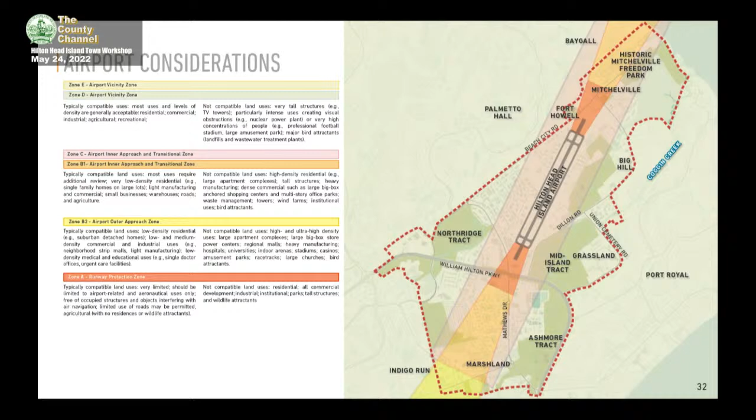What happens next is looking at potential changes in use and what those could look like. They have a development tool—an online tool. As we go forward, the town can plug those changes into it and see what regulations come back. So we have to start from what we'd like to see, and then continue to have conversations with them. But we've had a very productive opening set of conversations.

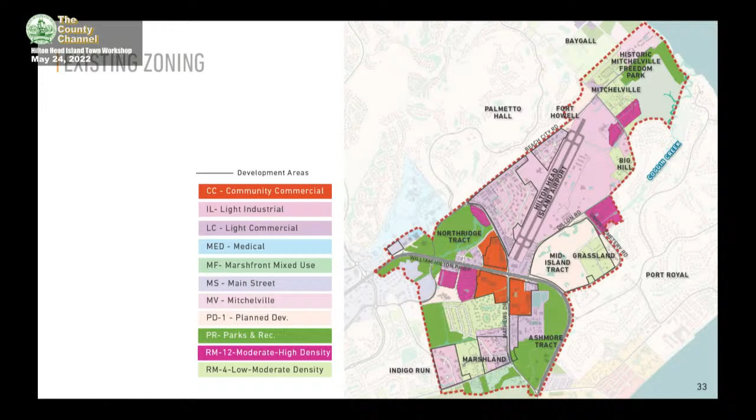Obviously, looking at existing zoning—what's there today. But in some cases we're more focused on what those land uses are, and where do we go forward from here. How might we simplify this map? We've got a couple places where we're suggesting some simplification, and starting to think through what kind of development we'd like to see happen here.

We'll also talk a little bit about existing residential areas and how those can start to harness the value of their property and add some housing to the overall needed supply on the island. Also wanted to take a moment to remind folks that we've also done a market study—when we look at this work together, there's analysis that we do, stakeholder input, and community feedback.

We also met with folks like the FAA and the state of South Carolina. We're also doing some analysis about what the overall demand is in this area.

We know there's some need that we've heard from the community for housing, and a desire to have a different kind of retail. So we look at what the demand capacity is, just to make sure that what we're showing and thinking about makes sense and is supportable in the marketplace. It's not saying all of this should or could be built, but it does say there's market support for this work we're doing, and that we're not thinking about something that will never happen.

So it's another piece of helpful information. I think it's interesting not to get hung up on these numbers or focus too hard on them, but really talk about the types of uses that are needed, meshing the need the community has expressed with the market supportability.

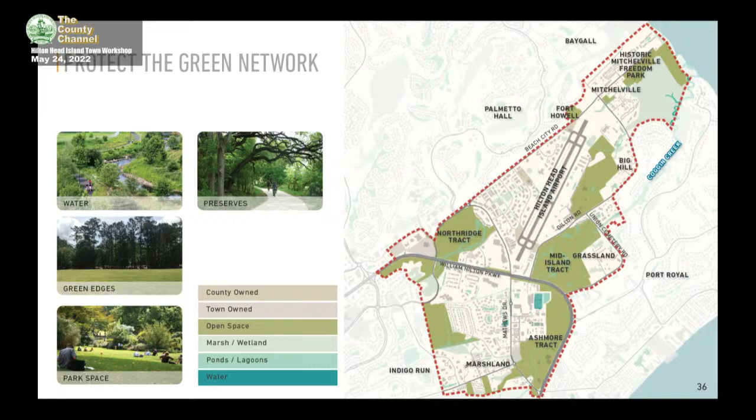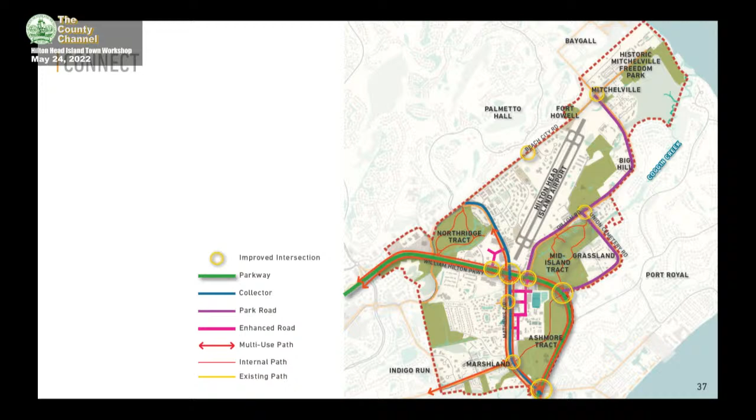This is a lot on one diagram, so I'm going to break it down a bit at a time. We want to talk about all the different types of connections that exist here, so we'll walk through that a little at a time.

Starting with the parkway, again, that green setback, that green edge really starts to create that park-like feel in the district, and honestly the entirety of the island for that matter.

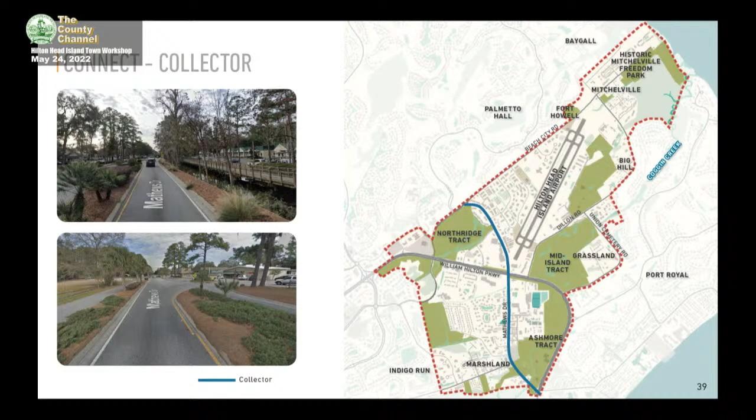Then we look at the next level of streets. This is Mathews, stem to stern, sort of your collector street. It's a connection, a place where we could take that character of having the multi-use path on both sides of the street. Again, very green, a connector between neighborhood uses along Mathews primarily here.

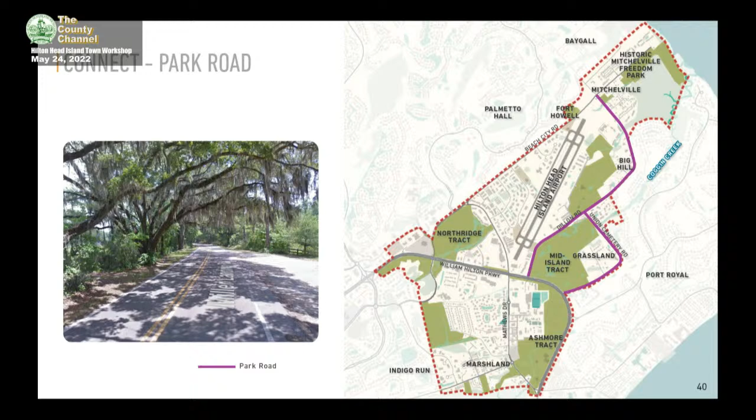And then what we're calling park roads, these roads that really have park on either side of them. They ought to be very park-like in character, have a multi-use path, perhaps not just on the park side of that road, and really provide those connections to the important green spaces throughout the district.

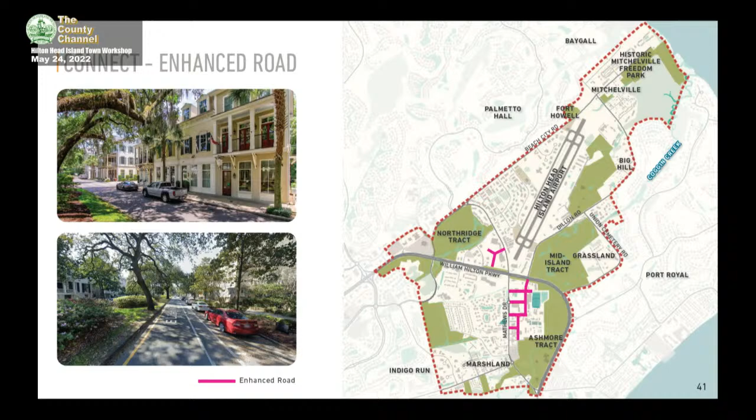And then interior to the block. As we start to think about changing the character of these commercial areas inside the Mid-Island District, we need to create, instead of driveways, drive aisles, and parking lots, things that start to look more like streets. That's what you see in these pink colors, as you come off both Matthews and the Parkway, you enter into these sites as they potentially evolve and redevelop. These become more neighborhood scale streets. You start to break down the scale of large parking lots, and you have something that looks like these images here, creating some walkable character inside of those developments once you're off the main streets.

And then the pathway network. Looking at the Parkway writ large, the goal is having multi-use paths on both sides of the Parkway, to make sure that character exists. Same thing on Matthews. Going down into Marshland, connecting through the Ashmore Tract with the trail to interconnect with the Mid-Island Tract, and then all the way up to Mitchellville Freedom Park, where there are some existing pathways. Potentially some ways to walk around the Northridge Tract as well. We've got this interconnected set of green spaces that enable people to get around the neighborhood in a different way, but also make the choice, if they want to leave the car at home, to have some experience as they go to new commercial spaces or visit the green spaces within the district.

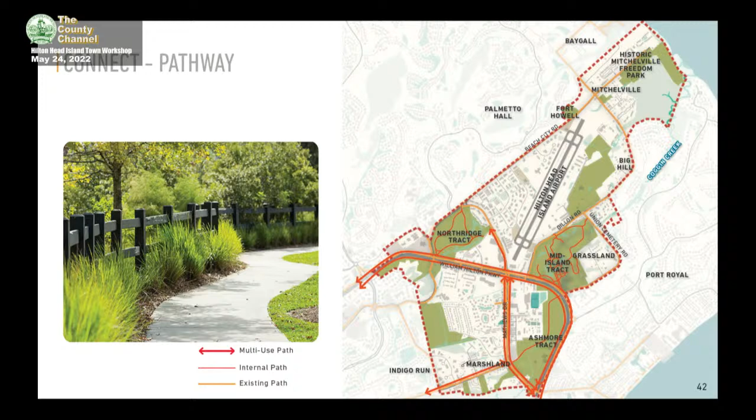So again, these off-road, multi-use, internal path connections tying into the existing path network is super critical as we look at the district.

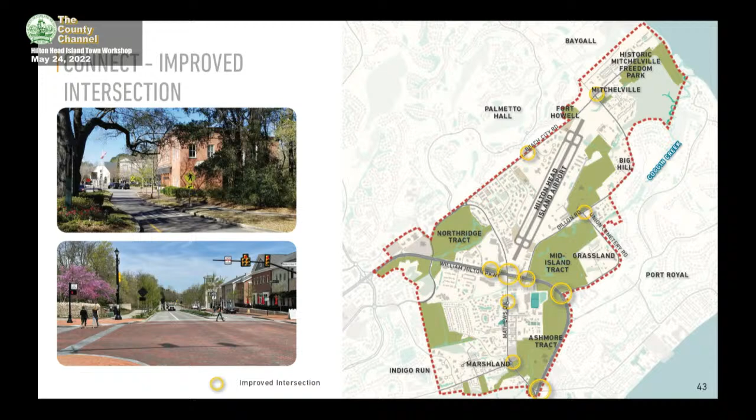And then improving these intersections. We know we need to safely get across 278. Significant opportunity there to make that crossing a lot better from one side of 278 to the other. But there are a lot of other smaller intersections as you go down Matthews, as you head up Dillon, as you get close to some of the other parks, as you go up toward Mitchellville, where we need to make sure we're getting people safely around the district as well. So really looking at where those conflict points are between vehicles and pedestrians, making sure it's safe to ride your bike or walk from one thing to another in the district. So really key importance that we'll be looking at there.

So these streets start to give us some character to build on. If we have a great green parkway, and an interconnected system of green streets and pathways that connect our park spaces and commercial areas together, where do we think we could start to evolve some land uses?

We'll start with the mixed use character that we think is possible here in these purple areas, as things change, as maybe property changes over. There's a desire to do something different than the big box, parking-lot-oriented commercial spaces you have today. What could these things start to look like going ahead?

So we talked a little bit about the mix of uses potentially there - residential, restaurant, townhomes, maybe some office, potentially some institutional spaces, all built around some open spaces that I think would be in the community. To get to some of these thoughts, we looked at the capacity of these sites, what the community desires are, and what's supportable in the marketplace. That's how we arrive at some of these densities - I don't think this one's very different than the Main Street category you have today, but 12 to 18 dwelling units per acre. That's sort of below where I think Harbor Town and other places are.

We think, in fitting with the height restrictions because of the airport, and looking at wanting these things to park themselves with shared parking, it starts to dictate how these things lay out. And then, of course, we've got that setback we're trying to preserve 150 feet off the parkway as well.

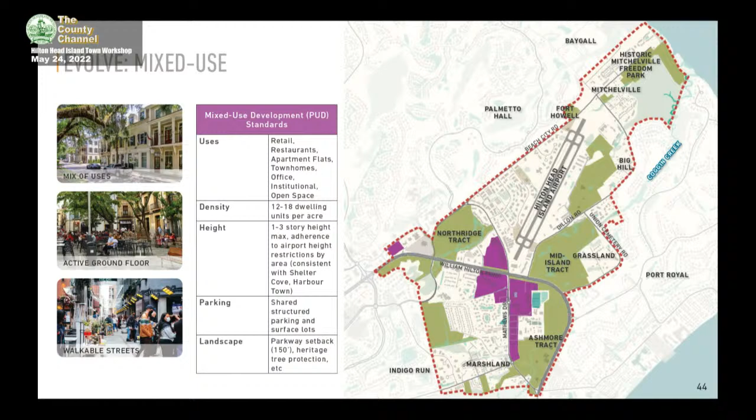So really starting to think through what could work here and what's the character going ahead that's both supported in the marketplace, desired in the community, and can show where we fit in this mix of uses, have active ground floors, have walkable streets inside of these parcels that make it more of a destination for the neighborhood and others who may be visiting the area.

Around the airport, the market study closely showed that we have a need for commercial and industrial warehouse type spaces on the island. That's sort of what's in there today. We do expect this probably evolves a little bit as the airport builds a refreshed terminal, and they have some uses there they're adding.

There might be some hospitality uses that come into this, but commercial support services. We've already seen a brewery open up in this area. So allowing for that sort of quirky mix of uses is okay. Those are the types of spaces where I think it's low cost, where you can have a creative startup type business locate.

And again, we're looking at an airport adjacency, so we're limited in terms of height, and the parking is dictated by other performance measures in this area, but it primarily is self-park depending on the use.

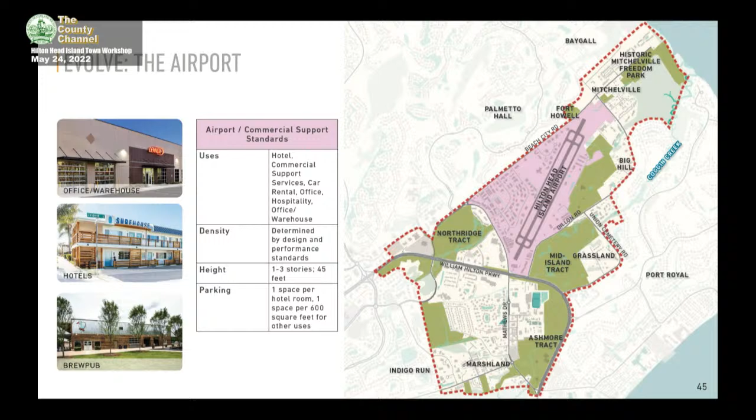And then the final category we look at are opportunities for additional infill in existing residential areas. So again, we're talking about lower scale housing like we're showing in these benchmark imageries—single family, maybe some townhomes, some park-under townhomes and cottages, parking handled on site, allowing for neighborhood commercial.

That's sort of the business-in-the-home type of commercial space. There's been a lot of conversation as you've gone through the Gullah Geechee culture preservation report about different types of densities—4 to 8, 8 to 12, depending on where you are. We sort of put the top end in there for the sake of conversation today.

But the bottom line is we think there's some opportunity if folks in those areas would like to add some additional housing that's needed on the island. The eventual density and what those development standards look like is open for discussion. The idea is, if people want to harness the value of their property, there's an ability to do so.

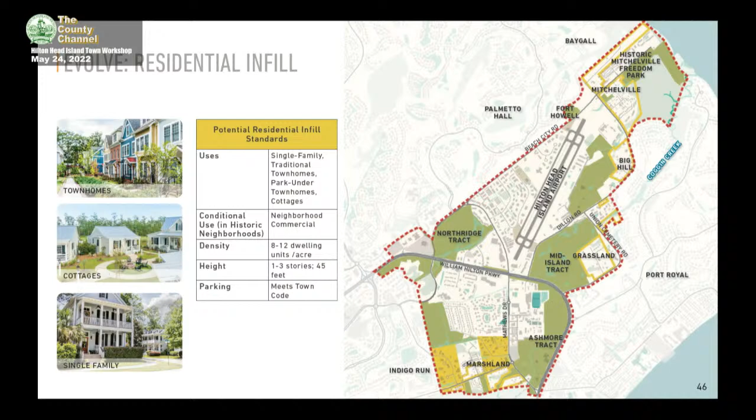And I know the overlay has been something you all have been talking about for more than a matter of months—that'll still continue past today. But we want to acknowledge those conversations are happening, and there's an opportunity here, if desired, to add to that residential supply we've identified in both the market and public comments, in addition to the mixed use sites we've shown.

So that's how all of this starts to come together. That's our thinking to this point—looking at those systems of both green spaces, an interconnected network of streets and pathways, and how that starts to inform redevelopment that could occur and evolve over time, and where those opportunities are throughout the district.

Our next steps will be to have some conversation today with you all, start to think about final recommendations, and bring that back to you in the summer with recommendations for future town actions—establishing that future land use map, looking at revising zoning if needed, establishing development standards, and creating redevelopment standards for key parcels going ahead.

And that will really start to guide those conversations, because we've realized some of this is town-owned ground, some of it is owned by private property owners, and you need to have the ability to have those conversations and shape what certainly will change. Things aren't going to stay the same. What do we want it to look like in the future?

Drew, let me ask you a question about that—something that's been on my mind. First of all, you've got a lot of exciting ideas here, and we can all get fired up about it. But one of the big challenges we face is that most of the land we're talking about, that is not the park site, is privately owned.

Mm-hmm. A lot of that is large traditional shopping centers. And you're encouraging getting away from that. And I certainly accept that notion as being a worthy goal for us. But what tools are available to communities to promote that sort of conversion from a large parking lot shopping center down to a neighborhood feel? What are the tools that people use for these things?

Yeah, I think it's a great question. And I think we're starting to, if you look at Port Royal today and what they've done, they're starting to respond to the market. So the market does shape some of this, which is really important. They're starting to take those larger boxes and subdivide them into smaller spaces. So you could argue that the market is already starting to push people in that direction, and starting to think through that with them, I think is really important.

There's an interim step we've taken with some private property owners that operate more traditional commercial spaces, and that is to start to pick away at those drive aisles and start to turn them into things that look more like streets, having open spaces, outdoor seating added to those things. So I think there's some iterative things you could do, but really it starts with crafting that vision. And so we say, look, this is where we see opportunity, and it enables you to go have a conversation with that property owner and say, all right, what is your view of the future? This is what we've talked to the community about. See where things overlap and mesh.

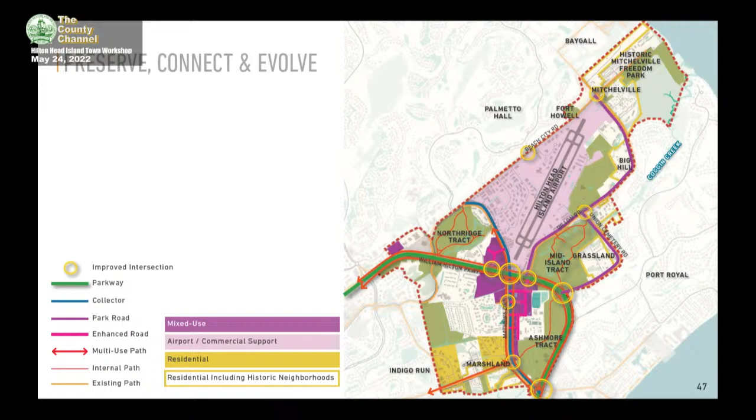It's the Mid-Island Tract and the park that would be there. So as we know, we need to accommodate the traffic. Under separate action, much more detail, including those intersections, so we'll satisfy those issues. But...

That's not one's fault. That's just the way the towns develop over time, incrementally. So we think it's important to establish a center to the place, provide for the conveniences and the daily needs of the folks that live in these neighborhoods in the Mid-Island. We're trying to create a center that maybe has not been here in the past.

Excuse me, if I could have a follow-up question on Glenn's statement. The path of least resistance to affect this change would be to have harmony of thought with the existing owners to move into a new direction. So an existing owner is going to want to know, when they think about possibly changing what they're doing from a service standpoint, from a retail standpoint, how strong is the market behind that vision. So my question is, how robust is your market analysis? Is it detailed enough so that an existing landowner or store owner could say this direction could get legs, this direction could be successful?

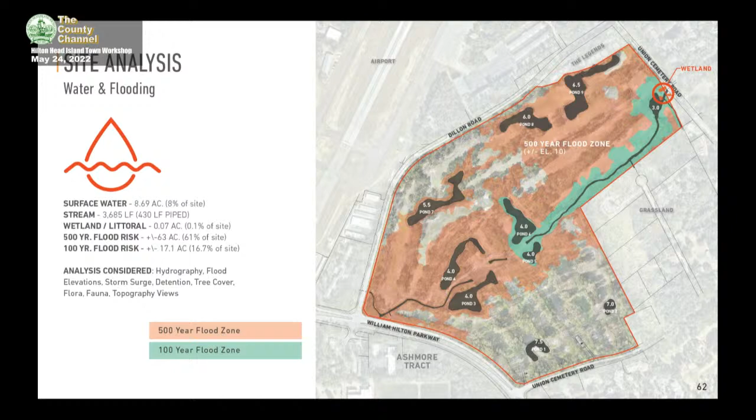We've done the physical analysis of this piece of ground, understanding that in its most recent use, this was a golf course. Though it's largely green, this place needs to be restored before we do anything moving forward. It's got a series of ponds that were used largely for irrigation, and many of them are lacking in high water quality. We've got flood conditions and storm surge conditions. So as you start to peel back the layers of the onion of what Mother Nature has given us, there are challenges and issues to be solved.

So broadly, we've broken the program down into three uses: civic and cultural, recreation, and natural systems. We've heard from the community that they prefer a passive park here. We've got other places to put our active recreation, and town staff has done a great job fitting active recreation into our other parks so that island-wide we can accommodate all needs and users. So we're not making this up as we go, though fortunately we've got experience working in wonderful cities and towns and creating wonderful parks.

But the council has suggested to us that we need to test this back against recognized national standards. We think it's important to understand that we have intentional design. We just don't create an open space, put a park sign out, and call it that. It needs to be inclusive and welcoming to everybody.

Sustainability and resiliency are baked in. We've got to be able to maintain it. It's got to be beautiful. It needs to fit the island character. It needs to be flexible over time. This isn't going to be a snapshot that carries on into the future. We'll constantly be remaking this park. Therefore, it is timeless. It needs to be branded and communicated.

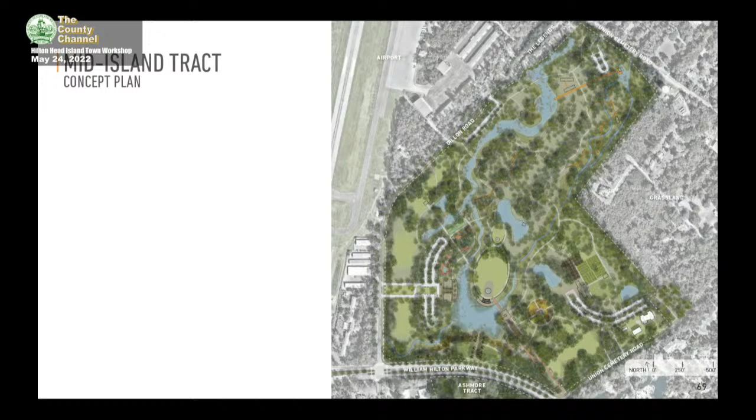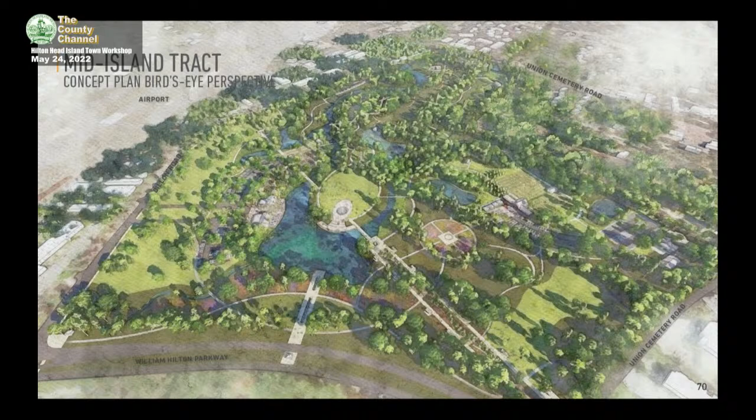This is an overall look at the 102-acre tract that at this scale is difficult to understand, so I'll break it down into the incremental pieces. This is a bird's eye perspective, hovering over the Ashmore tract, looking to the northeast with the parkway at the lower edge. Dillon is on the left, Union Cemetery on the right, and it gives you a sense of the size of this piece of ground.

We're blessed to have this size of park. It's also a challenge to pack these uses into 102 acres. It gets small in a hurry, and it's also large. Therefore, it's a maintenance and operations challenge for sure.

So we've broken it down into bite-sized pieces. We've got 5 areas we'll show you more detail of. First is the heart of the tract. We've mentioned the Mid-Island is the heart of the town. This is the heart of the tract. And I think as such, it needs to be that wondrous central gathering place.

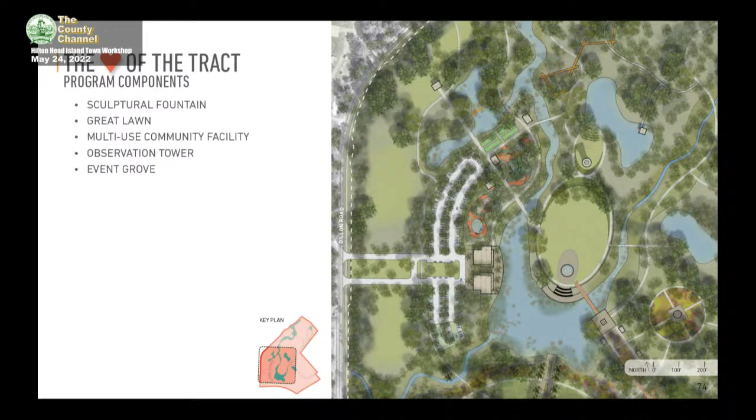This is the town's living room from where I sit. In plan view, that has an activity lawn, a great lawn that's between 1.5 and 2 acres of open space, maintained lawn for any number of events—4th of July, Memorial Day, Gullah Days, anything the island puts forth can happen there. Community facilities include an observation tower so we can see this beautiful piece of ground from a higher elevation, not just from ground level, a sculptural fountain, and an event grove or modest amphitheater for events and activities.

First, the sculptural fountain. Again, this is in clear view from the parkway. So as we are stopped at traffic lights at Dillon and at Union Cemetery, we've got diagonal views into the park, head on as you pass by the center of the park. The sculptural fountain is the annunciation that there is a place there.

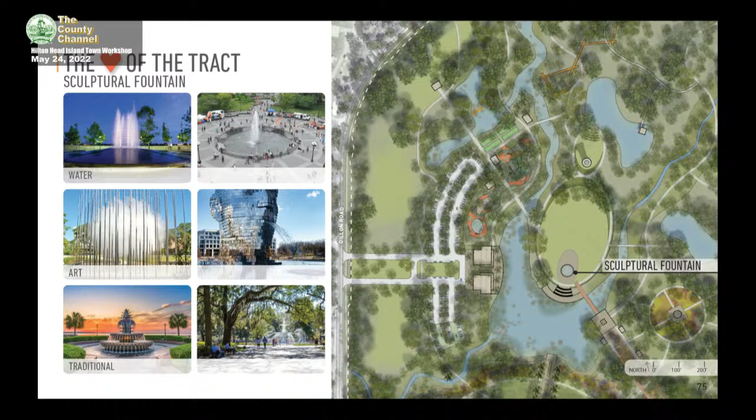We've got copious examples as we've shared with you in the past. It could be something as simple as a large single water spire. It can be a piece of sculpture or art, and it can be water as art. Some of the traditional fountains we show here, Charleston and Savannah, are local examples.

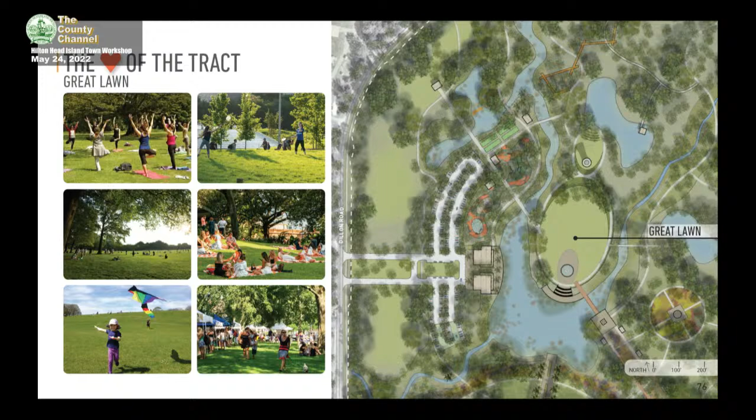The Great Lawn, again, a place for daily exercise, open play, concerts, activities, art exhibits, art festivals, any number of things. Again, the town's front yard.

An observation tower—this can be optional for sure. There's a lot of these issues we'll go through that are optional. There are also donor opportunities. We may find corporate or individual sponsors that want to buy that observation tower for the sake of the town. Again, this places folks at a whole different elevation and observation point for not just the eco park, but activity that happens in the civic space as well.

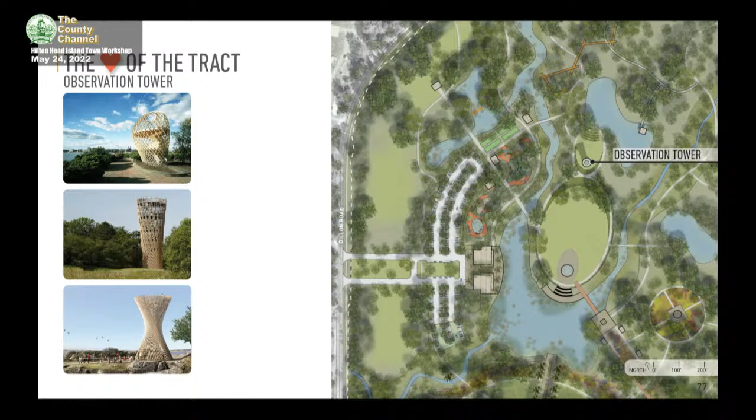How big is that? How tall is that? Certainly, there's public safety that has to be considered at every turn. How much does that cost? That's all subject to further investigation, but there's something very dramatic and exciting about getting people off grade and getting them perched up above the canopy.

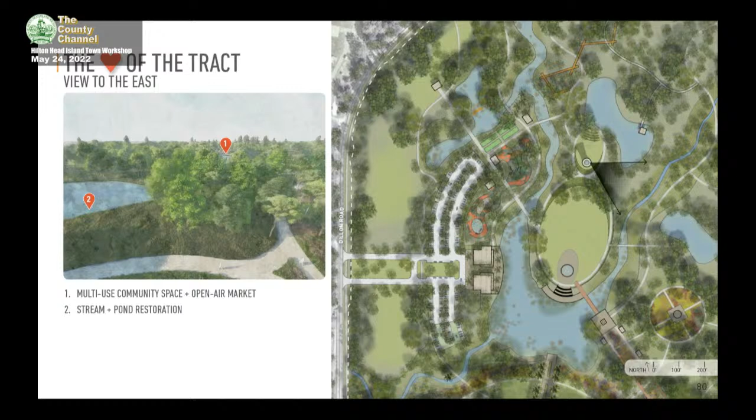So you can see in this perspective sketch from that tower what you would see looking to the east, looking at the Great Lawn, looking the other direction to the Eco Park, being above the canopy, seeing the water bodies, and then into some of the cultural gardens and the event grove.

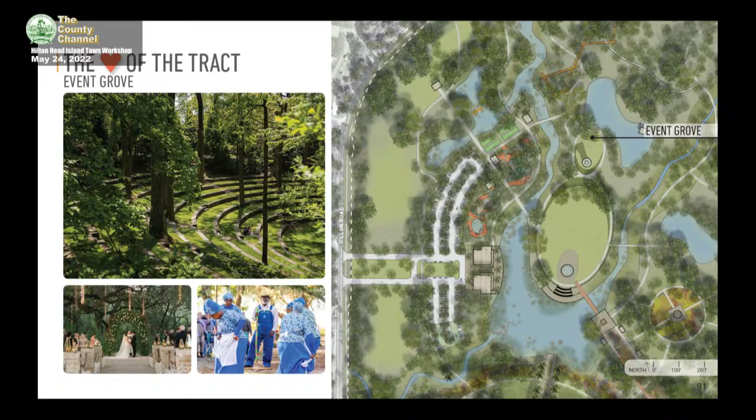That is an area that is not meant to compete with Lowcountry Celebration, some of our bigger outdoor events, or even some of the things that happen at Shelter Cove. But this is a great opportunity in a beautiful environment, off the beaten path as it were, for weddings, small performances, recitals, poetry sessions, any number of small, more intimate events that is directly adjacent to the event lawn of the Great Lawn, but has some intimacy to it.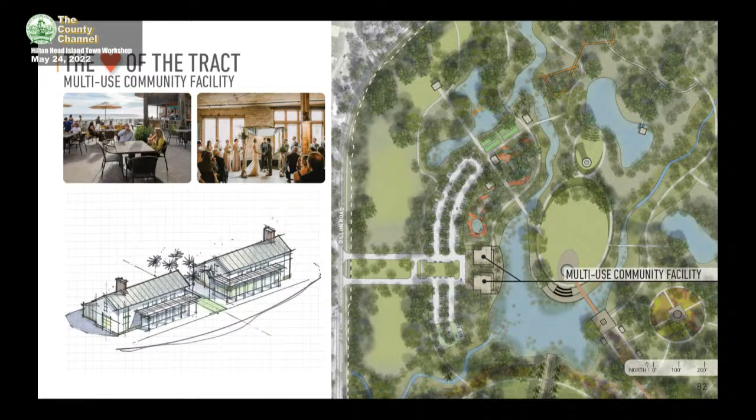Also, accessed off of Dillon Road is this multi-use community facility, a place for receptions, gatherings, weddings, funerals, with full food service that can be supportive of those activities. It can be freestanding food service as well, but town-owned, town-developed, and operated.

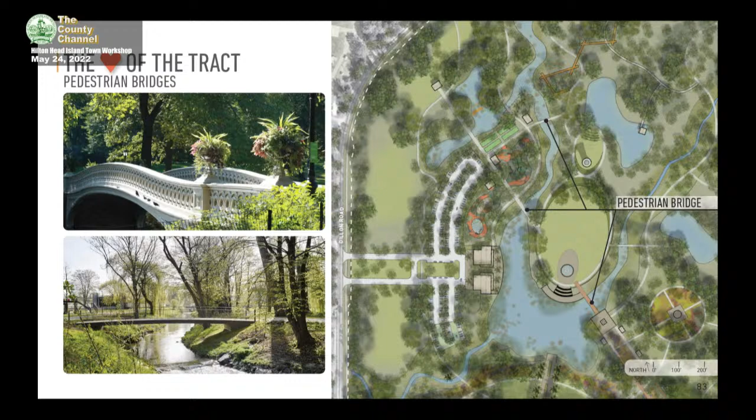And pedestrian bridges. This peninsula, if you will, looks to be an island from the southwest, but I think we can bring civic architecture to the table as well. The upper left example is creating art out of something that has a legitimate function to it. That's moving people from one place to the other, so they don't have to all be prefabbed, off-the-shelf pedestrian bridges. We can make a statement and a piece of art with them.

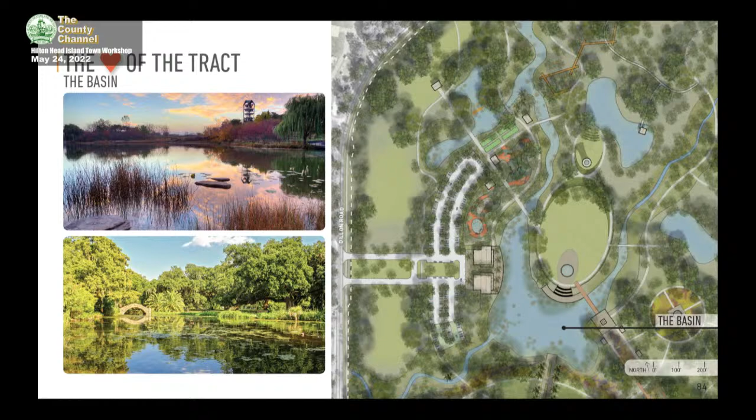The basins, as I mentioned before, the ponding system there does not have high quality water or wildlife for that matter. We're looking to interconnect many, if not all, of these ponds so that we have a natural flushing of the water system from the watershed that starts to the south and west of Port Royal Plaza and flows through this site. Take advantage of that interconnectedness and create legitimate water bodies, not large puddles, and help with the aquatic growth.

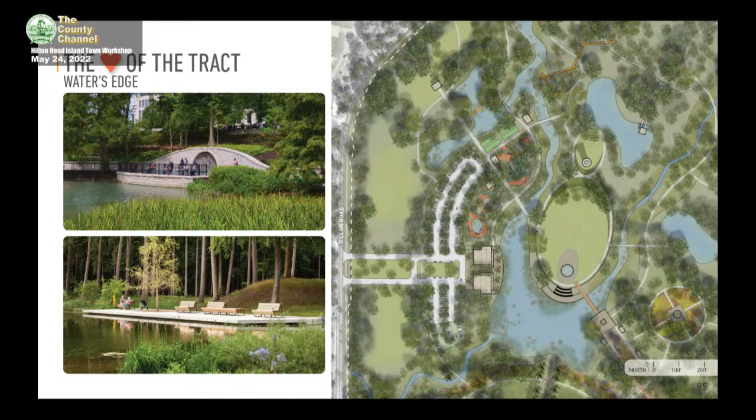Also, to have water's edges, get people to the edge of the water, but not necessarily into the water. We've got critters in that water. We have that all over the island, but to take advantage of those water bodies for pure viewing pleasure and for relaxation is an added benefit.

Moving to the next district is what we're calling the Island Heritage. Again, I shared with you the importance of the historic neighborhoods that are in this district. This is physically, literally the backyard of the Grassland neighborhood, and there is a distinct need we've come to realize through the public process for outdoor gathering, for multi-use space, for an open air market for the sale of foodstuffs and crafts, communal gardens for legitimate growing of food stock, and also outdoor gathering.

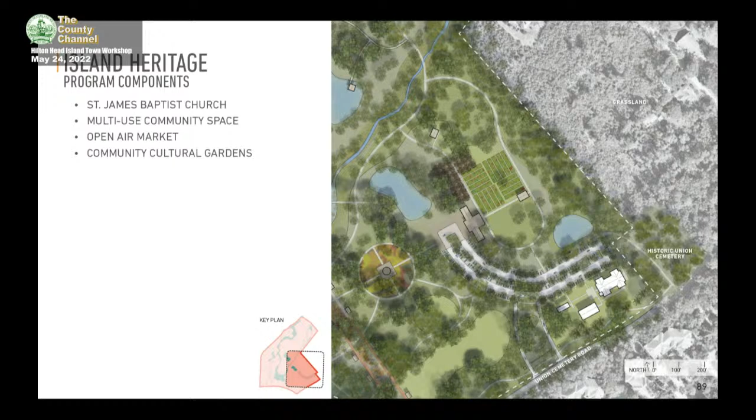You can see these buildings in the lower right are the relocated, rebuilt St. James Church and a relocated schoolhouse. It's in close proximity to the Union Cemetery on the flank, but it's also in direct connection to this Island Heritage. We think this is a great opportunity for, one, segregating parking, but bringing parking together and taking advantage of all of that parking for certain events, while giving a distinct place where we can celebrate the island heritage in a garden that is specific to that historic heritage.

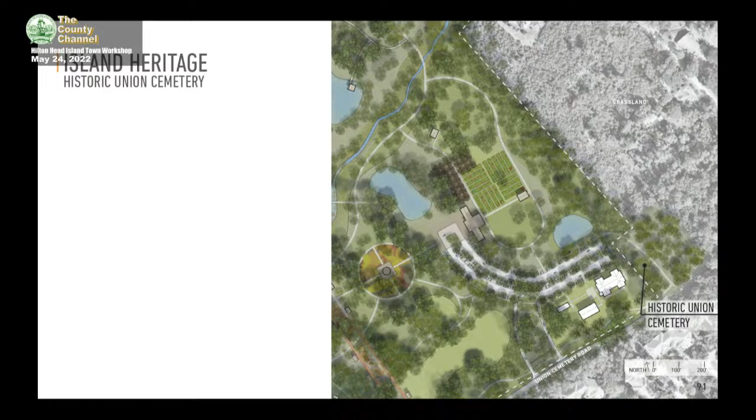So this is images from the church. We've slightly refined their site plan to make it fit into this corner. But the Union Cemetery is directly adjacent there too.

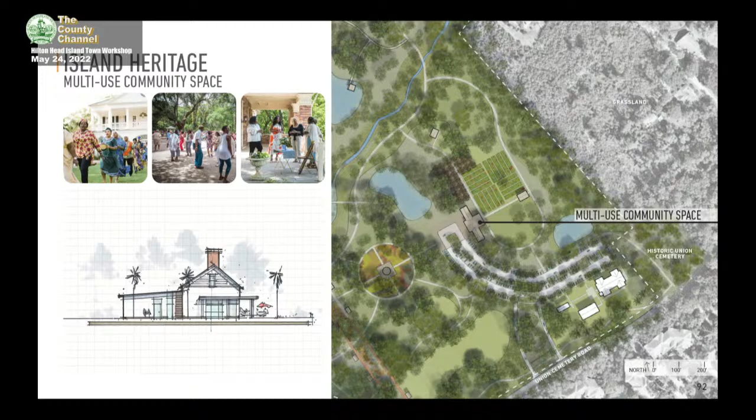A multi-use community space. We've heard from the community that there is a need, specifically in the historic neighborhoods who have depended upon their churches and those facilities for venues for weddings and for funerals and for receptions and for graduations, and that there's not a place large enough or more centrally located for that community to gather. We think this is a great opportunity to do just that.

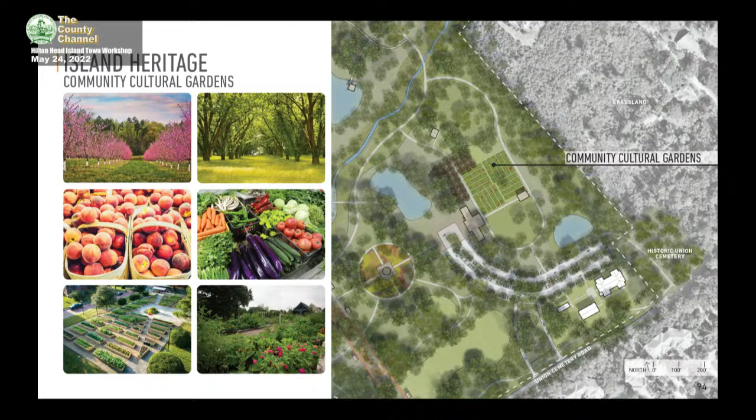Cultural gardens, I think that should be legitimate food production that we're putting on people's tables, not just a museum piece by definition. It can speak to our culture and history, but it also has a current day use to it. A garden shed and pavilion, think of this as open air shelter, but it also serves a function vis-a-vis the garden and some of the activities that can happen there.

So as a whole, there's convenient parking, drop-off, opportunity for pop-up tents, opportunity for food trucks. Portions of this can be open while other portions are not. It can all come together as one large venue, subdivided. This parking and open ground adjacent to the lower left of this image will also accommodate the Concours parking that heretofore has used the fairways of the now closed golf course to satisfy their vendor parking. We can still accommodate that, but in a more organized fashion.

Next, the Cultivated Landscapes. Again, Union Cemetery is on the lower right, the Parkway is at the bottom of the image. We've created a series of more formal gardens. We've got a promenade that leads views and is also activity space from the Parkway. It doesn't touch the edge of the vehicular pathway, but we do have a trail system that interconnects all of this.

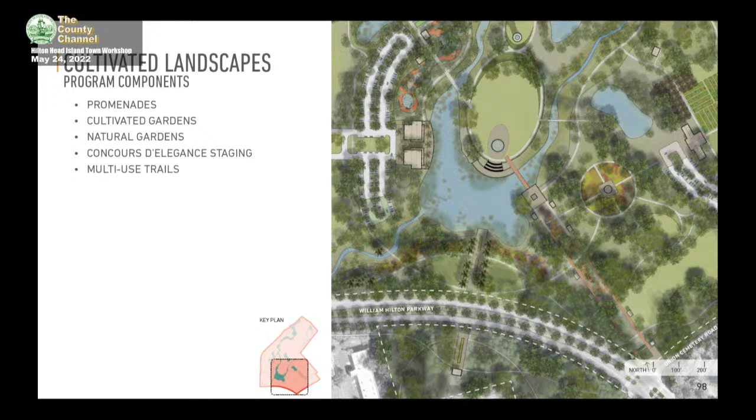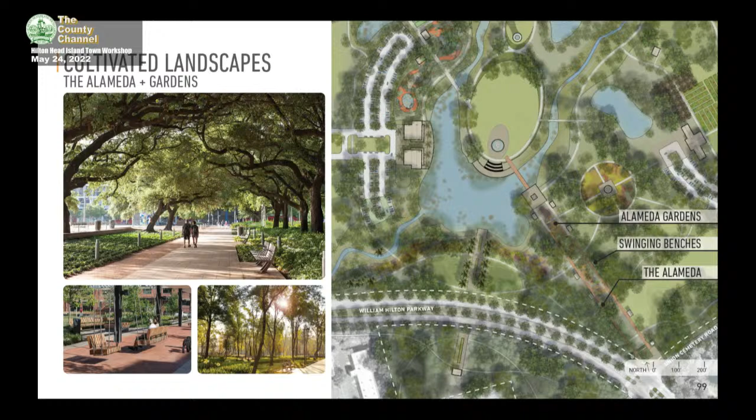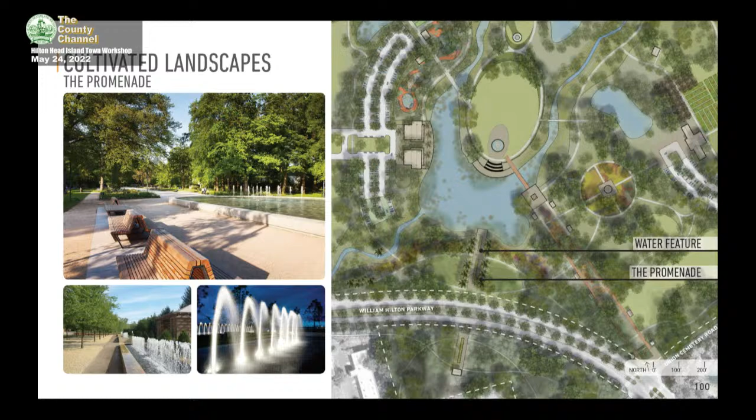These are cultivated gardens. We've used the term Monet garden in the past. A number of formal garden expressions can be put in this area. We've got the Alameda, a longer promenade with swinging benches and garden space in the center, leading people from what would be an improved intersection at Union Cemetery into the heart of the park and to the gardens themselves. The promenade might have low water features, again to draw the eye to the central water feature and the lagoon. A Monet or a formal garden.

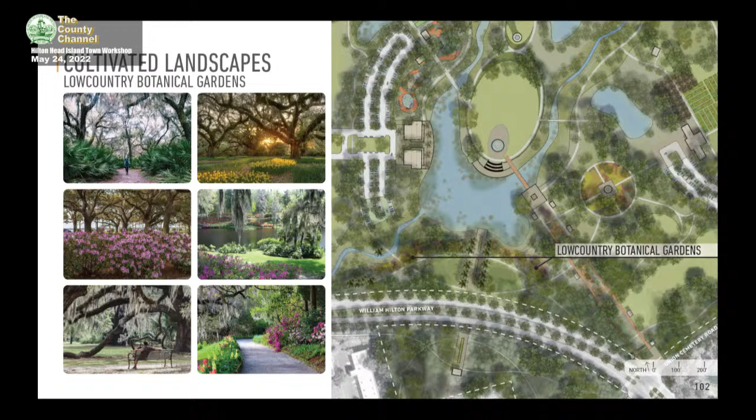Cultivated gardens, including low country. We might have native low country plants that are intentionally planted and exhibited. Throughout this, we can also have an arboretum and showcase some of the wonderful trees that we have on the site and augment that population, and take advantage of the water bodies with aquatic plants as well. Not causing people to step into that water, but allowing people to observe those plants from the edge of the water.

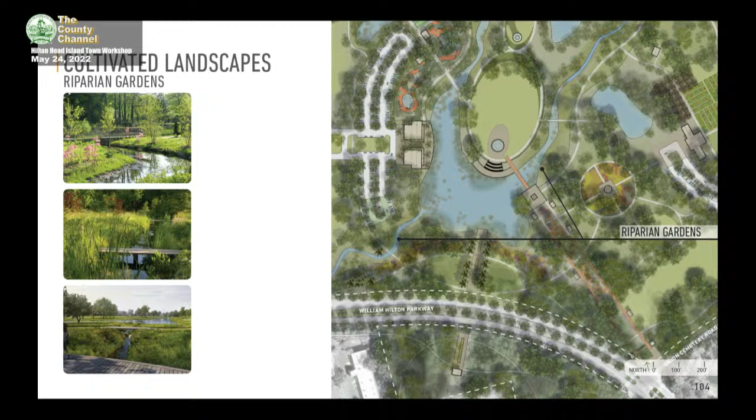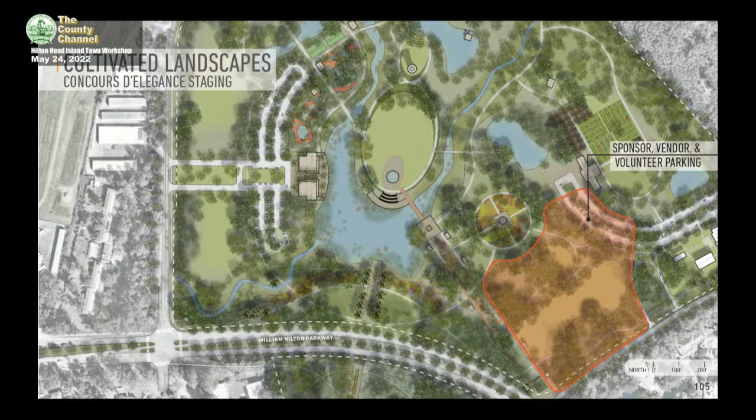And then along the riparian edges - again, this is a water course, this is a golf course that needs to be reclaimed, if you will. We can take what is a drainage ditch and turn it back into what should be a stream corridor, and then plant that and be able to circulate around it appropriately. As I mentioned, we can accommodate the Concours as well for their staging area. We've got open fields, we also have structured parking, and we can get them off of and back onto Union Cemetery and out to the Parkway in pretty efficient fashion.

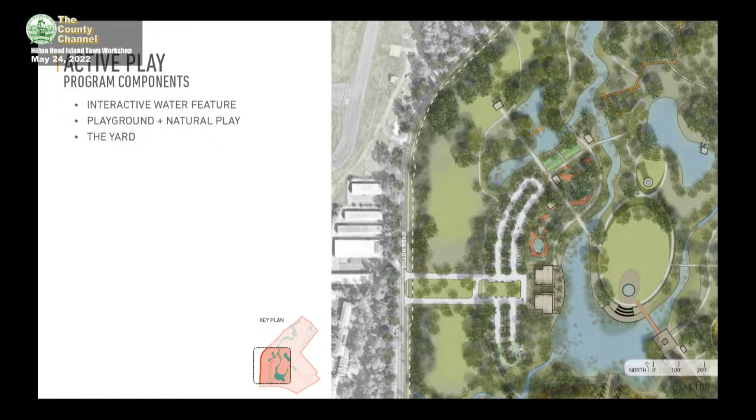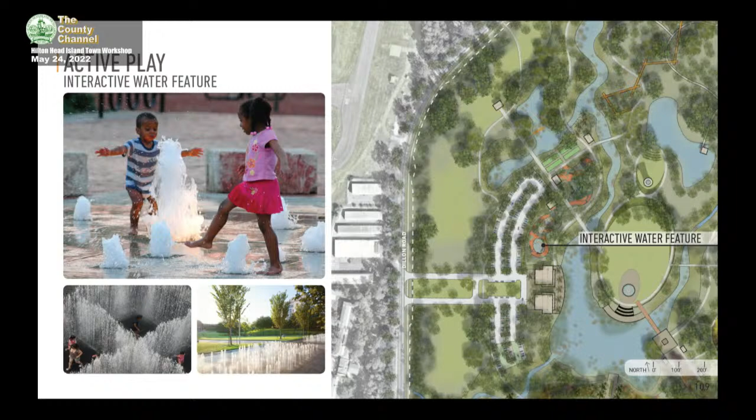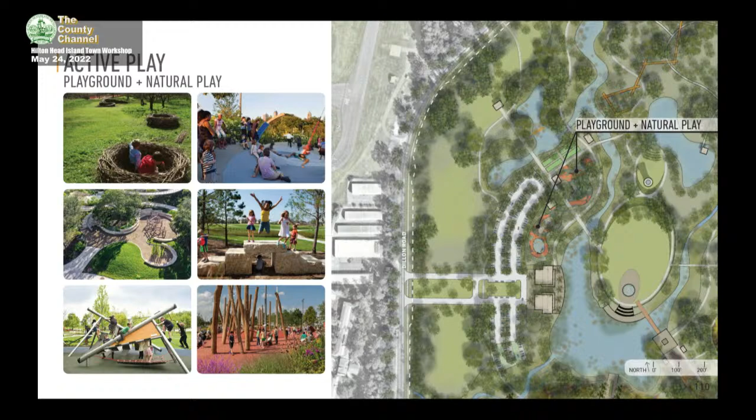On the Dillon Road side of things, we've got the opportunity for active play. That's a place where we have open and dry ground. We'll take advantage of the parking coming in off of Dillon Road to allow for parking for the play area, for the yard or open play, and interactive water, as we've done so successfully on this island and elsewhere. Nature play - maybe this is something that speaks more to the natural environment of the property and not a packaged play area.

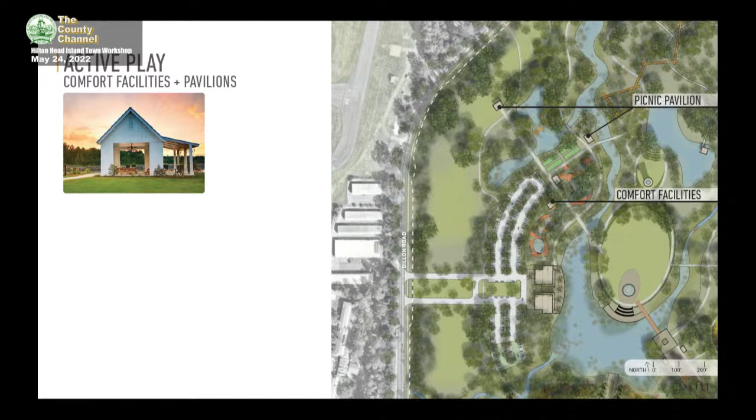A place for picnicking and for classes of kids and families to congregate. A yard for active play. There isn't proposed to be any structured or league play here, but we've got sufficient area for open play. We think it's a great opportunity for more human scale things that don't take up a lot of land use - simple bocce courts, or certainly chess tables and oversized chess games, things that will draw other constituencies to the park.

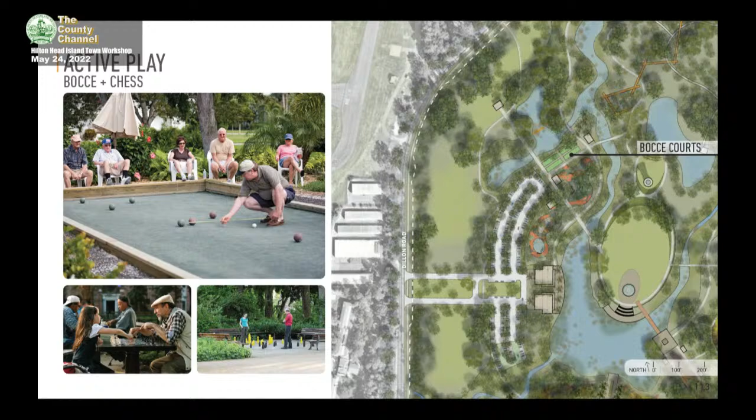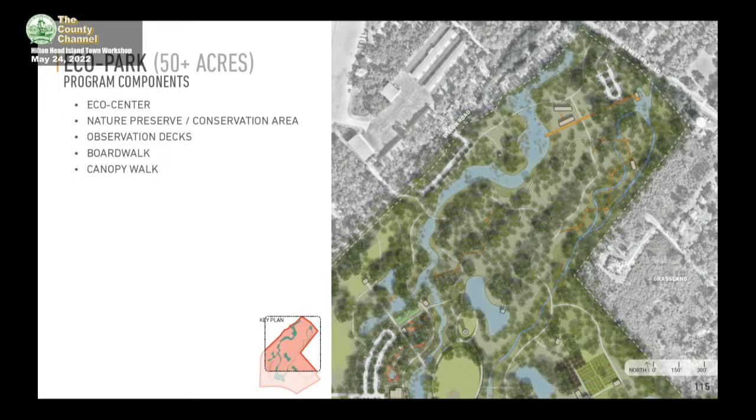Again, this parking is centrally located, so once you get out of your automobile, there's a lot of things that you can do, a lot of places that you can walk through a comprehensive trail system. Again, the eco park, that's the majority of the park. This was largely golf course. You can even read in this plan some of the fairways that exist. We've got some remedial action to do with healing some of the past wounds of the golf course.

There's an opportunity for a legitimate eco center, a series of small buildings or sheds where we can preach the gospel of the natural systems - learning opportunities, not just for school-age children, but for tourists and the community as a whole. This can be our trailhead, if you will, for people to park, get out of their automobile, get off their bicycle, put it in a rack, and walk the trail system and learn about the great aquatic and flora and fauna of the place.

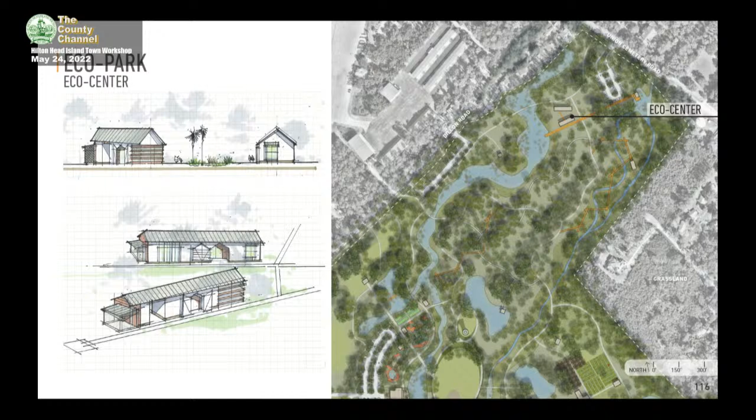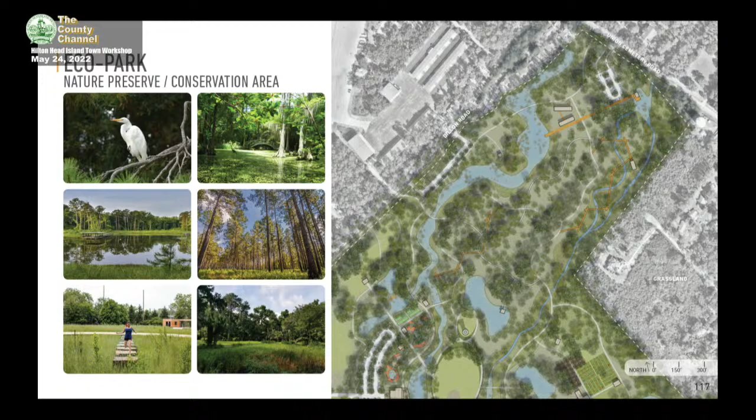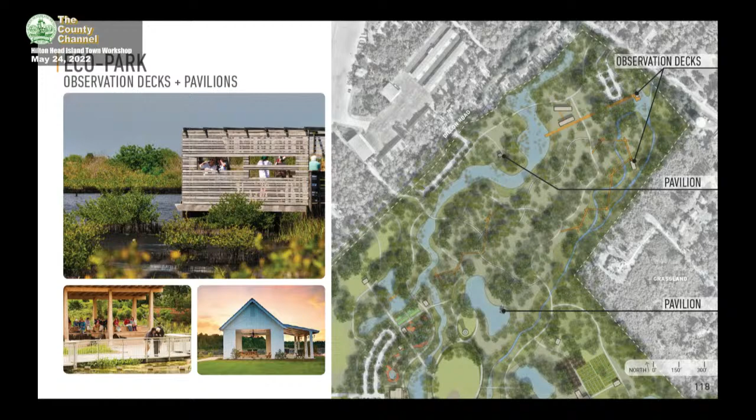So we don't have to do much in this area other than deal with water quality and put back some trees and plants that are maybe more appropriate to the natural systems than what was planted as part of the golf course. But we are blessed with a great stand of mature trees, and we think there's great opportunity for habitat as well. To that end, we can create a series of blinds, observation decks, pavilions, where we can rest, relax, and take advantage of those environments.

And there may be an expansion of the wetland that exists along that north leg of Union Cemetery, and take a boardwalk across that wetland so that we can use it as an educational opportunity. Wetlands are also beautiful, beautiful places.

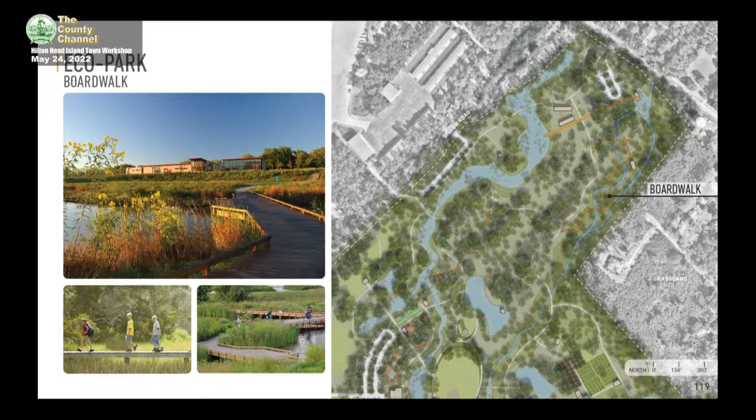Since we have this beautiful canopy, there's a great opportunity to have a canopy walk, to take people off the ground plane and put them up into the canopy of the trees to observe the park and the eco park from a completely different vantage point. Again, another donor opportunity—a place where someone steps up to help us fund such a thing.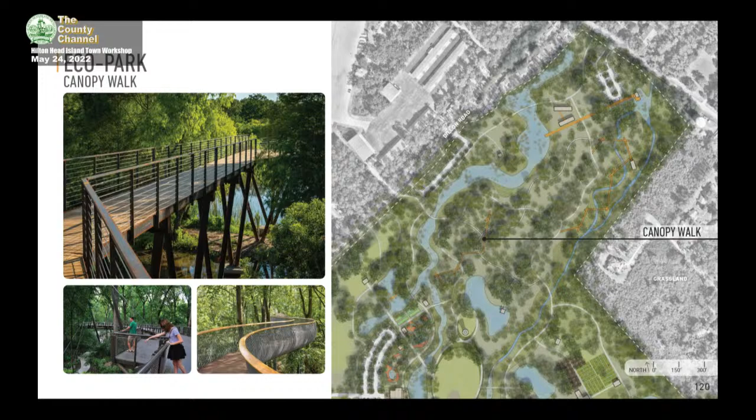In perspective view, you can see hovering above the parking area how we can get out of our automobile, access these buildings, be directly into the aquatic area of the park, and have a complete circuit through this natural area. And then a view of that elevated canopy walk.

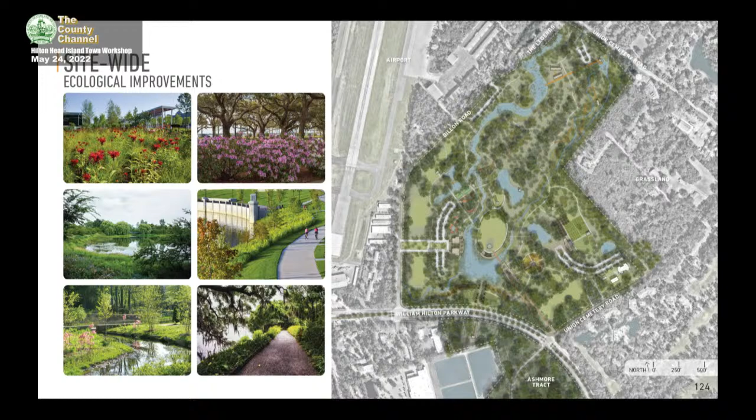Again, I mentioned some of the site-wide things—those are the geographic subdivisions. Site-wide, we've got ecological improvements to be had. There's some vegetation we need to preserve and enhance, and others that need to come out that are invasives or non-natives. So we look to repopulate and replant certain areas. The fairway clearings may very well be reforested.

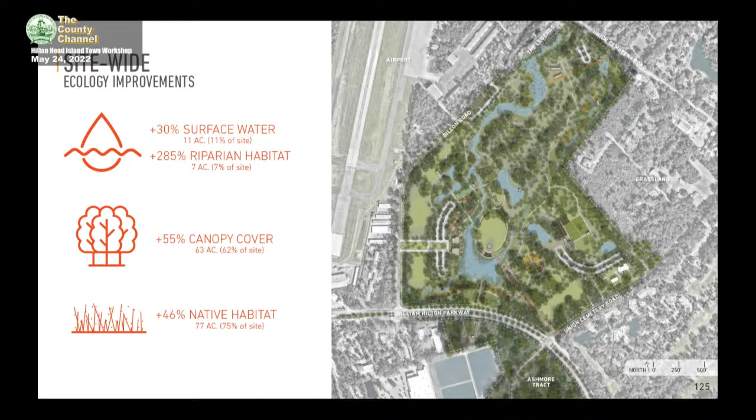We're increasing the surface water, increasing the kidneys, if you will, of the island. We've got the opportunity to contain and filter and then slowly release more water than that piece of property currently accommodates. So we're increasing the canopy cover, increasing the native habitat. I think we can create a place that is for people, but also heal the environment at the same time.

Art opportunities—great opportunity for public art expression. We have that on this island. One man's opinion: I think public art needs to be carefully curated. But that's all I'll say about that. We've got an opportunity within the gardens, within these more public places, to exhibit art examples.

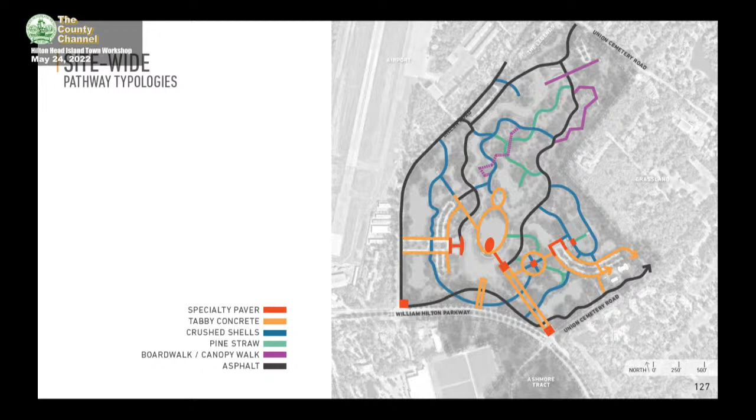Pathways throughout—this isn't just paved asphalt trails through this area. There's a number of surface types. This is more diagrammatic than will actually be built; there's a lot more design that needs to go into this. But it can be concrete, crushed shells, pine straw, screenings, wood decks, asphalt, and certainly specialty pavement in certain areas, around the fountain being an example of that.

We've got parking—almost 600 cars of parking, not to mention some of what we're proposing to be on-street parking on the surrounding streets. So people can pull, Dillon as an example, on northbound Dillon—stop your car, pull over the curb, get out, and walk into the park. Today there's no walking into this park because it used to be a fairway with a fence and overgrown vegetation. So we're looking to open up the edges so folks that live in these neighborhoods can literally walk to their neighborhood park. If you're coming from afar, there's sufficient auto parking to be had.

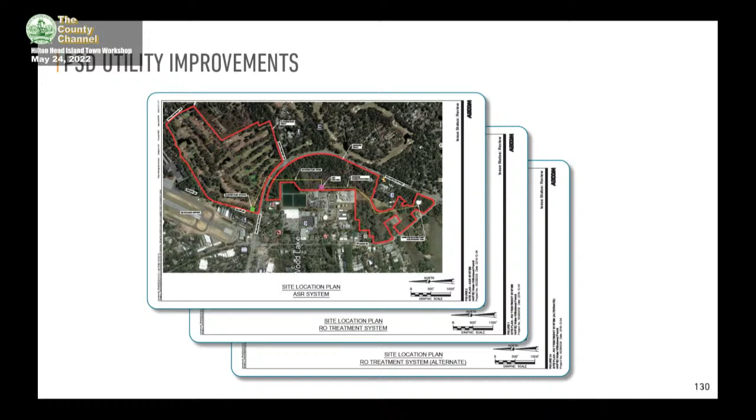We know Ashmore has got some PSD utility improvement needs and demands, but we couldn't help linking Ashmore to this—I'll come back to that in half a minute. Speaking of Dillon Road, we think it's important to deal with the edges, open up that park edge into the park, have some on-street parking, maybe slow some of the Dillon and Union Cemetery traffic speeds down, and have a multi-use path adjacent to the road but separate from it—more of a park experience than a road experience.

These intersections—we've got to get people safely across the streets. We've observed from crash, accident, pedestrian, and bicycle conflict data that these are two very dangerous intersections, certainly Dillon Road. We would propose, we'll have to see if it stands, a warrant that Union Cemetery be signalized, so we're physically stopping traffic to allow for pedestrians to cross. If there is connection through Ashmore to Marshland and all those neighborhoods, we think it's a great opportunity for them to take advantage of this park as well.

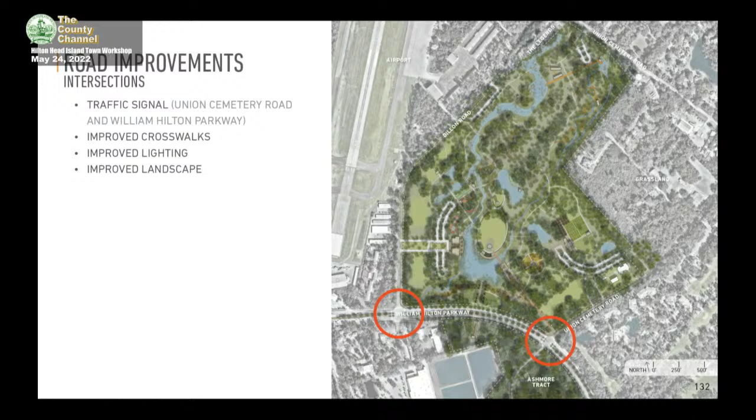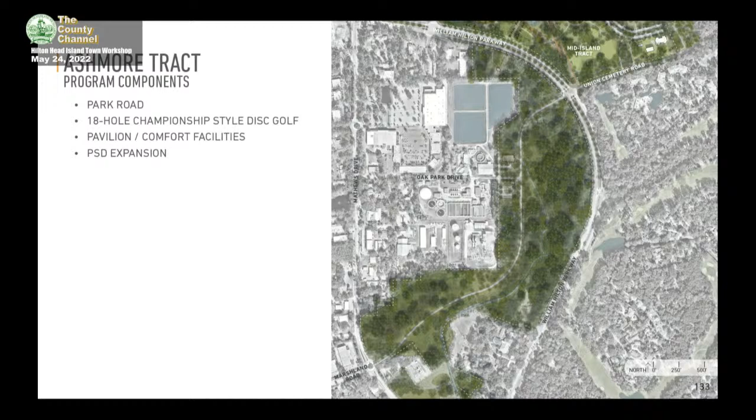Relative to Ashmore, we've got some program that we want to fit in, and that is an 18-hole disc golf course that will have to be strategically routed through trees. It's done all the time. We'll provide some pavilions and comfort facilities, a trail system so we can get from Marshland to Union Cemetery, and should Port Royal Plaza redevelop over time, a great way of connecting all those folks to the open space and park. So this is a conceptual routing of how the golf course would fit in.

Unless you're out there with one of those discs in hand, you're likely not even going to know there is a disc golf course there. Small signs, baskets that receive the discs, that's about as invasive as those get. This is a very sensitive environment, and we've got to remain that way.

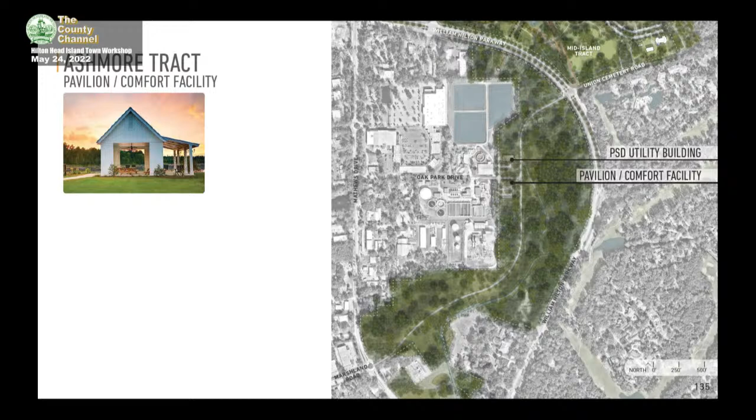PSD has got some plans for a new utility building and some routing of utilities. We think we can also complement this with another pavilion and comfort station. So that's the park and its systems.

So to give you some scale of costs - and I'm here to tell you we haven't gotten to the costing piece of this yet, next time we get together we will talk costing and phasing - that 66-acre park in Tulsa was $460 million. That is an anomaly, probably the most expensive park per acre I've experienced. But I needed to bookend this conversation with that.

Going down to Summit Park, it's a $60 million park on 130 acres. So you start to frame what some of these sizes and costs per acre are. We use a rule of thumb for this type of park design of $1 million an acre as a place to start - some of these are less, some more. It all depends on program and what Mother Nature has delivered to us. We're fortunate to have this plethora of open space and former golf course, so we don't have to do a lot to half of the park.

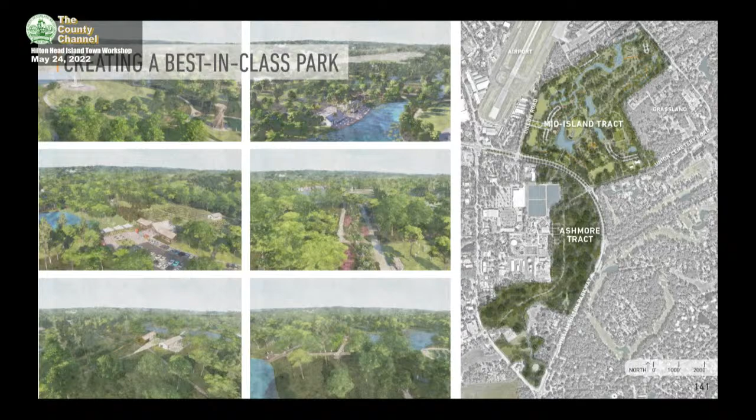With that, I'll go back to this and answer any questions that anyone may have. Including, if you have an idea of a name, let us know as you go through it.

Okay, well, thank you. It's super exciting. You can see all the work that's been done. I think it addresses everything that it needs to address. A lot of my questions were somewhat answered as you were going through.

One of my first reactions was to the dislocation of our four-legged and winged friends who make that area their home. It seems as though there's some opportunities, but I would be certainly very sensitive to not invading space that is otherwise occupied.

Question I had was, as you were going through it, from the Great Lawn to the play activity area, is that the same space, or is that two separate areas? Two separate areas, but they're a modest distance apart. It would generally be in the same area, yes.

I was trying to track it. Oh, there's a good example. That event space is, I hope you can see that on that image behind. The play space is right across that pedestrian bridge, right there, Councilwoman.

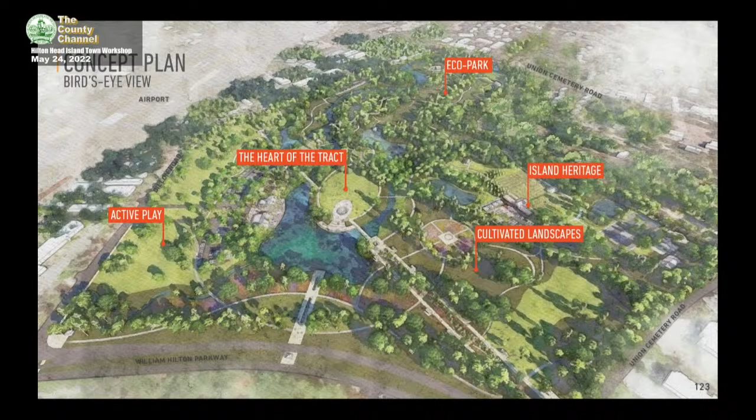Okay. And then parking and spray pool and community facilities are all clustered in that area so that we can come in off of Dillon Road, park an automobile, and that is all conveniently located. So the Great Lawn is where the heart of the tract is, is that what you're saying? Yes, ma'am. Okay, so it is, okay.

I know this is a question for later, but that is unprogrammed activities to take place in that area, right? It's pick-up ball, whatever, picnics. Unprogrammed recreational activities. Unprogrammed, right, recreation space, okay. The garden, I loved the idea of the vegetable gardens.

How does that work? Operationally, organizationally, a number of ways. They can be directed by the town, they can be community organization based. I think in any event, it should be a partnership among those.

There's opportunities for partnering with our local restaurateurs to take some of those foodstuffs and literally put them on tables right there in that community building. There's opportunity to engage the local neighborhoods to physically and emotionally own those plots, to harvest those goods, to pick those apples and peaches. It isn't, it can be, but in my view, it isn't meant to be a museum piece. It's meant to be a place where we grow food.

Yeah, a working garden. How much land do you envision that is? Oh boy, yeah, 2 acres. You can grow a lot of tomatoes in 2 acres, by the way.